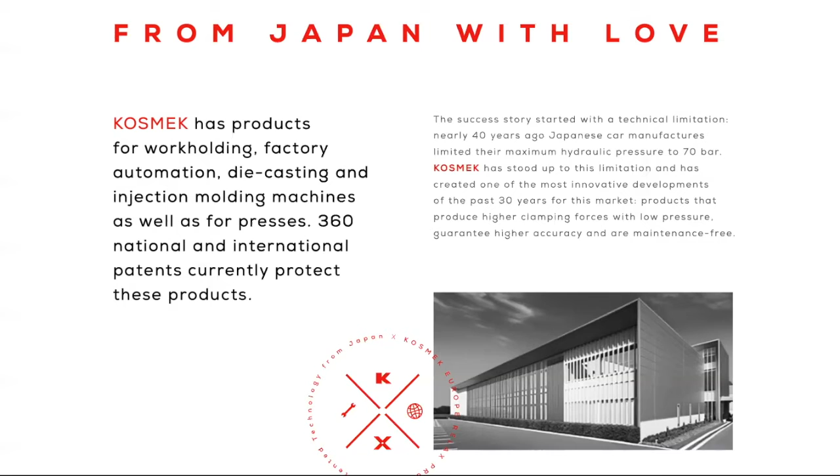KOSMEK is the world's leading expert in powered clamping. Due to the limitation from Japanese car manufacturers to 70 bar maximum pressure 40 years ago, KOSMEK developed one of the most innovative technologies for pneumatic and hydraulic work holding solutions like clamping, positioning, and supporting, and also for the factory automation range. Since then, KOSMEK has been the continuous market leader in Asia. 8 years ago, the increasing demand on KOSMEK's patented low-pressure technology brought the company to Europe.

KOSMEK is the only company in the world covering all areas of a workpiece production process. We offer solutions for casting, injection molding, and punches and presses. For example, quick mold change systems, ejector rods for changing of ejector patterns, positioning of the mold, and pre-rollers for easier loading and unloading of the die. In terms of work holding and machining, we have various hydraulic pneumatic clamps, work supports, and other positioning solutions. In terms of factory automation, we have tool changers, pallet changers, and even grippers.

Now, have you ever thought about your machining center being able to autonomously machine without any operator on the machine? What would that mean for you when a robot automatically changes workpieces on your machine depending on what you are making? Or what would it mean when a robot is able to flexibly insert the raw parts into the machine and unload the manufactured parts from the machine? Or what would it mean for you when a robot did it all for you with different devices, workpieces, and low lot sizes while your employees are not in the company or are not available at the moment?

I would like to bring answers to these questions in this following webinar, because KOSMEK is able to bring these processes onto the robot itself. KOSMEK is able, because of the zero backlash technology, to guarantee a repeatability of 3 micron, as well as to reduce the hydraulic usage for the upcoming process steps. Because of this reason, please let me show you in the following slides how you are able to achieve this at your machining centers as well.

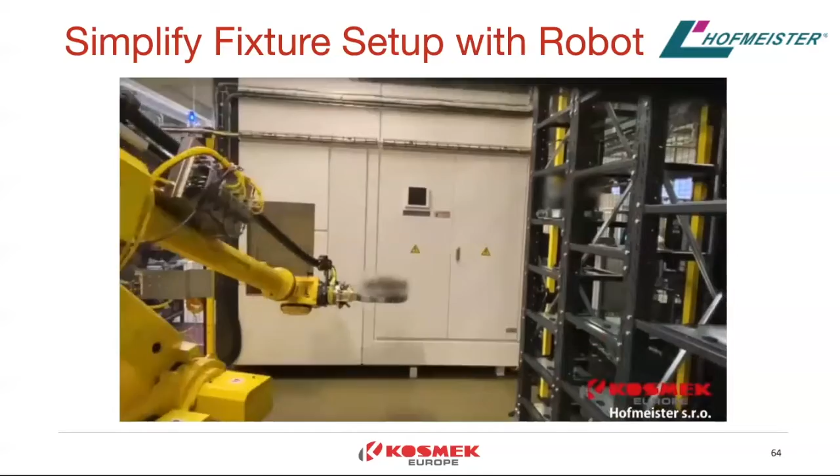With the KOSMEK WVA pallet gripper, the robot can automatically load and unload pallets up to a weight of 100 kilograms to the machine table and place or remove it from a storage.

On the table, the pallet will be fixed and positioned with the KOSMEK VS 0-point clamp system. With the patented dynamic positioning technology, and high clamping forces of up to 40 kilonewtons, this zero-point system guarantees a repeatability of 3 micron even after millions of loads.

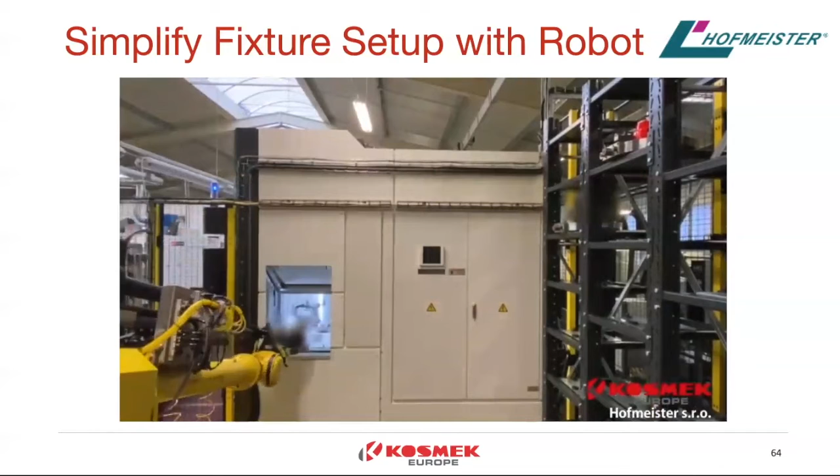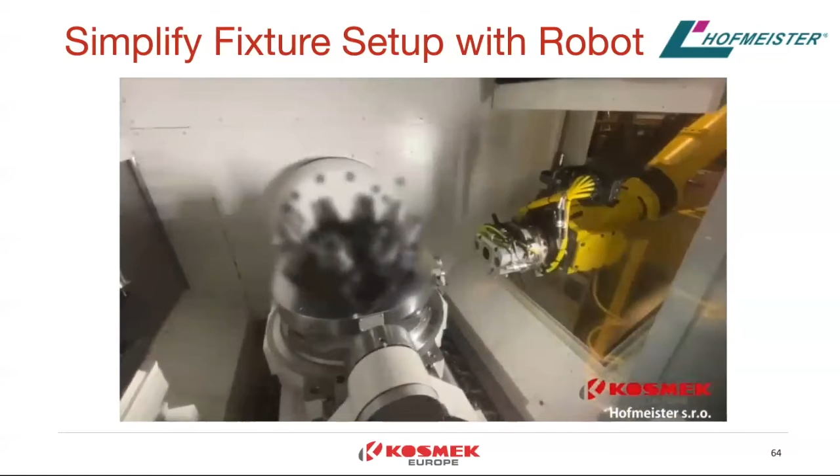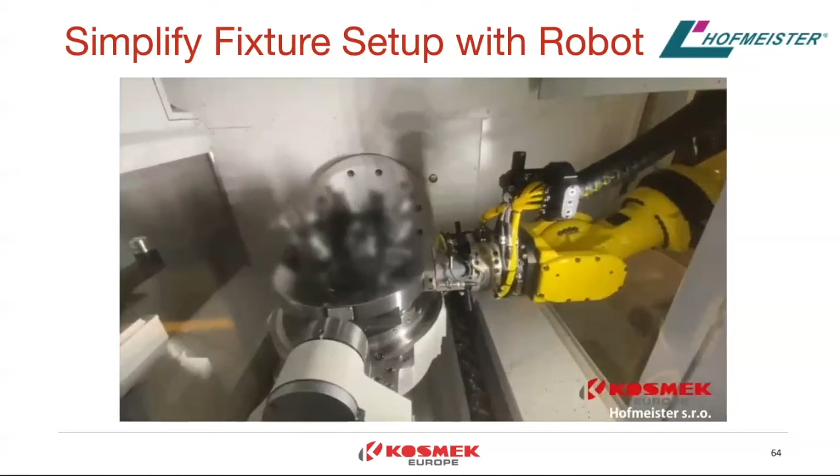Depending on the size and the weight of the tool, it can be changed to a different size of pallet gripper or each other tool of the robot. This can be done through KOSMEK SWR tool changers. This robotic hand changer is the only hand changer which is completely backlash-free in the whole world. It is even stronger, but at the same time smaller than other products on the market.

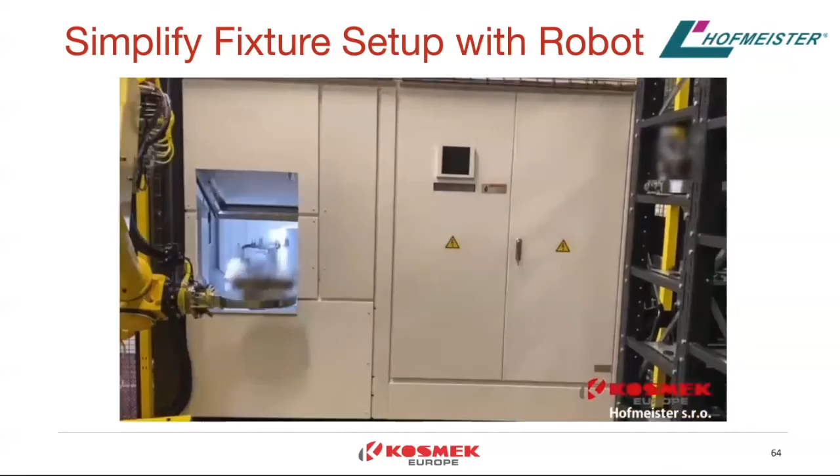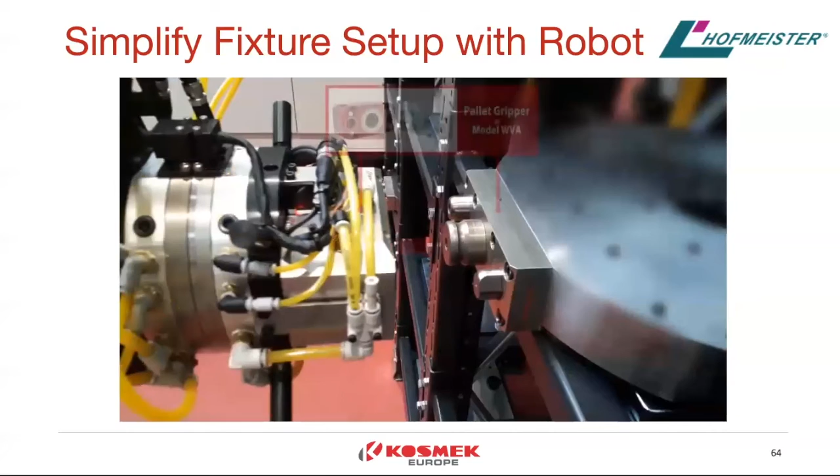All of these unique technologies combined into a highly effective automated manufacturing cell allow the company Hofmeister to automate the production of many different smaller lot sizes, to drastically reduce the setup times, increase the overall product quality and precision, and let the production go on autonomously during the night or the weekend times.

Now let us get some information about the used products for this setup in the next slide.

Have a look at the WVA pallet gripper in detail. The KOSMEK WVA pallet gripper is designed especially for gripping, transferring, and placing heavy fixture pallets in a machining center by a robot. In this case, the pallet has a weight of about 100 kilograms.

With our pallet gripper, we can reach holding forces of up to 33 kilonewtons or 3.5 tons. It has a safety lock function so that you still at 0 bar have a holding force of another 1.9 kilonewtons. The pallet gripper can take over up to 1,322 Newton meters in bending moments and in twisting moments up to 1,800 Newton meters.

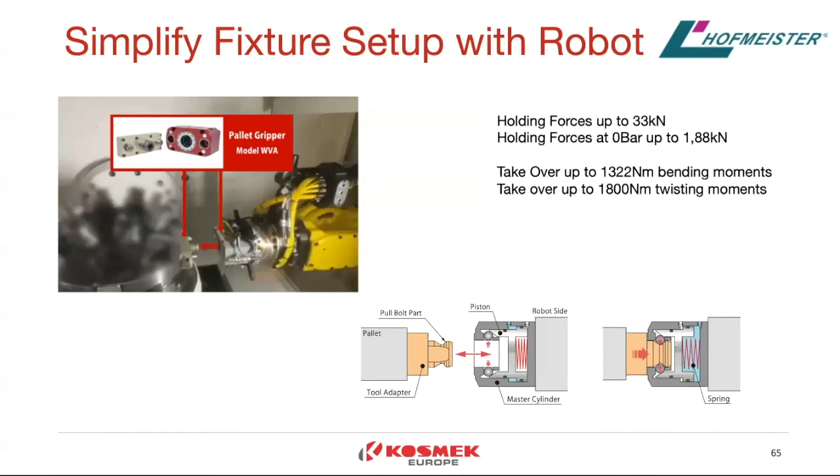Once the pallet is brought to the machining table with the WVA pallet gripper, we need to clamp and position the pallet on the machine table, and to do this with a repeatability of 3 micron and at the same time a clamping force of up to 40 kilonewtons.

Which depends on the model, you can use the KOSMEK zero-point pallet clamp system, VS for hydraulic or WVS for pneumatic. The clamping forces vary from 2 kilonewtons up to 40 kilonewtons in the hydraulic type and from 2 to 16 kilonewtons for the pneumatic type.

Also here we have a holding force at 0 bar, which goes from 0.8 kilonewtons up to 2.2 kilonewtons. The zero-point systems are totally maintenance-free and guarantee the repeatability for more than 1 million loads in total.

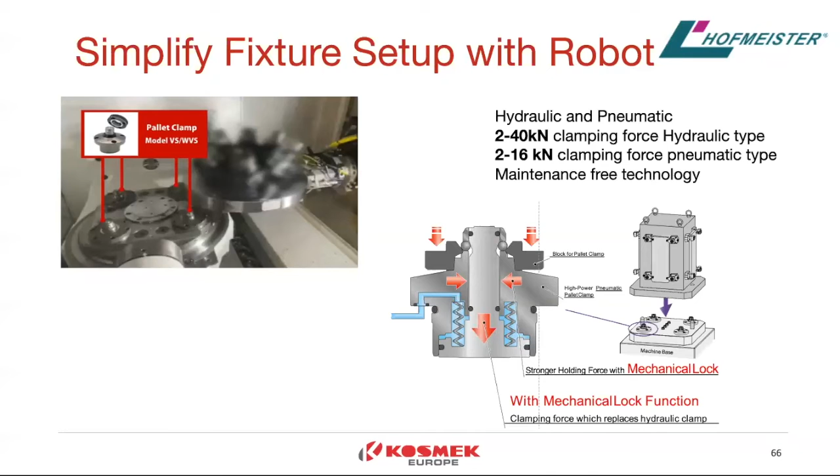Now, the pallet is transferred to the machining center with the pallet gripper WVA and highly precisely positioned and clamped to the machine table. Now, your robot can start to load the raw workpieces to the fixture for the machining. To do that, you now need to change the tool.

This you can easily do with the KOSMEK SWR robotic hand changer. This unique robotic hand changer is the only hand changer in the world with 0 backlash. It takes over higher bending and twisting moments than any other product on the market. It is smaller and stronger than standard tool changers.

Its repeatability is also at 3 micron and it has a range of payload from 0.5 kilograms up to 360 kilograms at 10 bar pneumatic pressure.

For automated production, it offers seating detection for a proper connection, holding force at 0 bar as a safety function, airflow for keeping the robotic hand changer clean, and various modules for electrical and pneumatic connections to the robot.

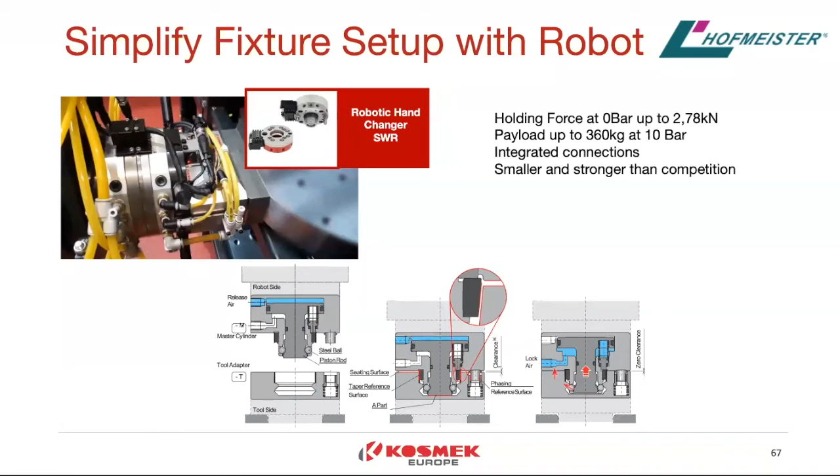Now, coming to the company Jägerspris Finmechanics in Denmark. Their task was to minimize setup times and make production much more effective by using robots in a production line.

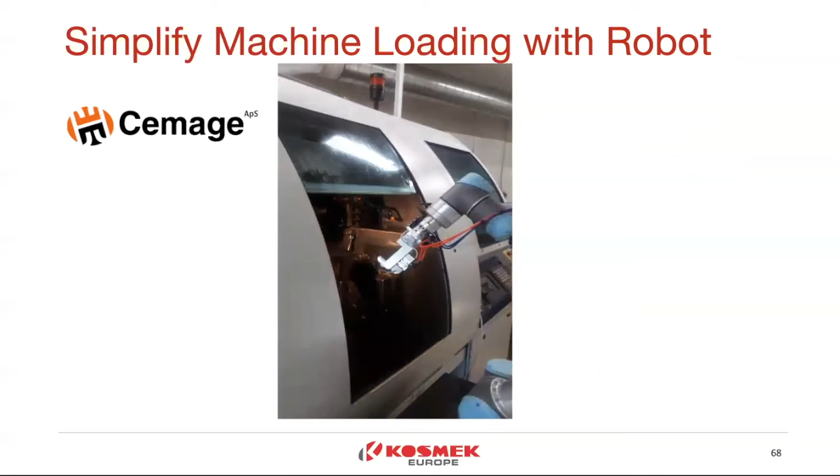Company Cemage introduced their mobile robotic unit SEMA for automated loading and unloading of workpieces in a lathe. The SEMA mobile robotic unit not just can load and unload the workpieces in one lathe, but due to a special interface between the lathe and the mobile unit, it can be moved from one lathe to another and so increase flexibility of this robot unit.

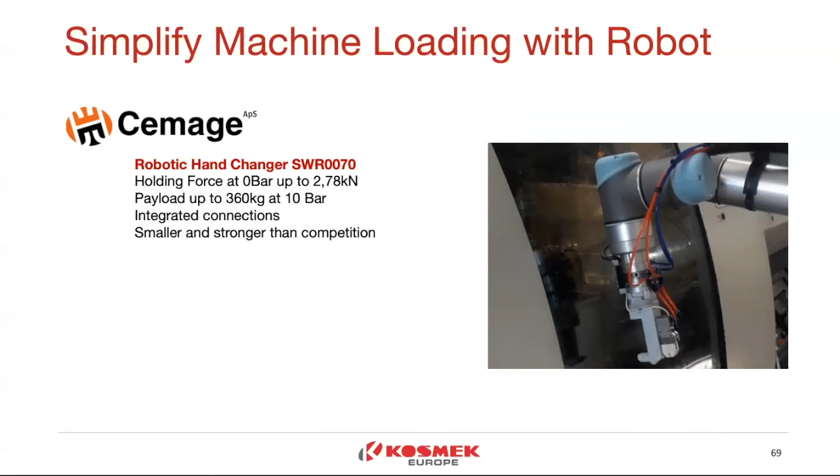The mobile unit is equipped with components as follows. The mobile unit is equipped with the KOSMEK component robotic hand changer SWR. It is for an easy and fast secure change of the grippers and tools for the robot, depending which workpiece shall be handled. Then, on a tool changer, there can be mounted various grippers and other tools.

In this setup, the customer uses the unique parallel gripper WPS-C with high power technology and holding force at 0 bar. The WPS-C can achieve up to 131 newtons in clamping forces and up to 400 newtons in holding force at just 5 bar.

Holding forces at 0 bar as a safety function range from 26 newtons for the smallest and up to 53 newtons for the biggest model. The repeatability of 0.01 millimeters is also given for transporting of the workpiece out of the machine.

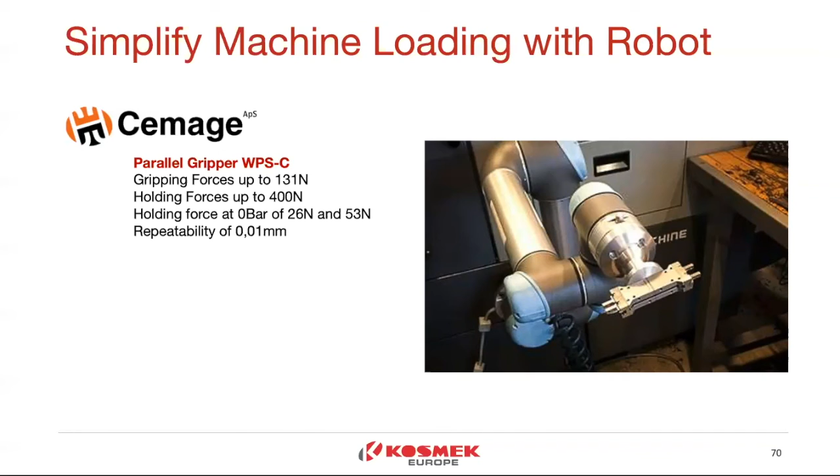And the specialty of connecting the SEMA mobile robot unit to the lathe housing is the KOSMEK ball lock cylinder WKA. With this very small but effective pneumatic ball lock cylinder, you can easily fix and position the mobile robot unit to the machining center housing.

When moving to another machining center, you unconnect on the first center and connect it on the next. Now coming to some facts about the ball lock cylinders: it is very, very small but highly durable due to a simple design. It is locked by spring force to the designated space, and depending on the size of the ball lock cylinder, we have a holding force of up to 200 newtons by a weight which goes from 7 to only 41 grams.

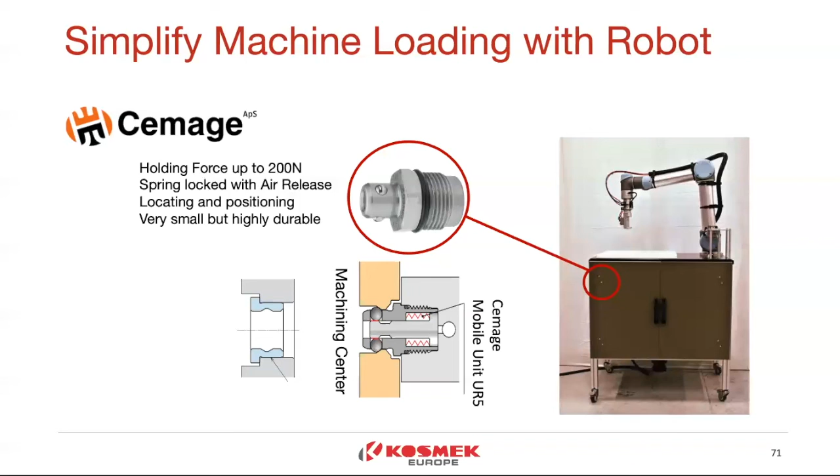Now let us have another look at the Cemage mobile robotic unit from Cemage.